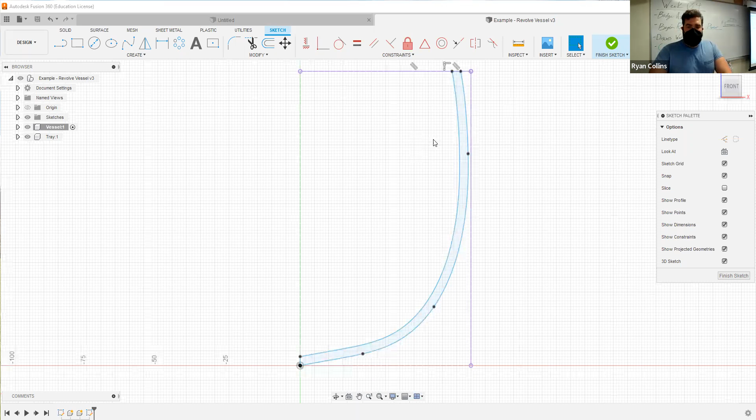So I left off finishing up this profile. Instead of using a fillet to round over this top, I wanted to use a circle, so I'll go to create circle—not just a circle, a 2-point circle. This lets me select these two endpoints and create a circle based off that, which is a convenient way of making a rounded top. I can trim this out to make things easier, so I'll go ahead and do that.

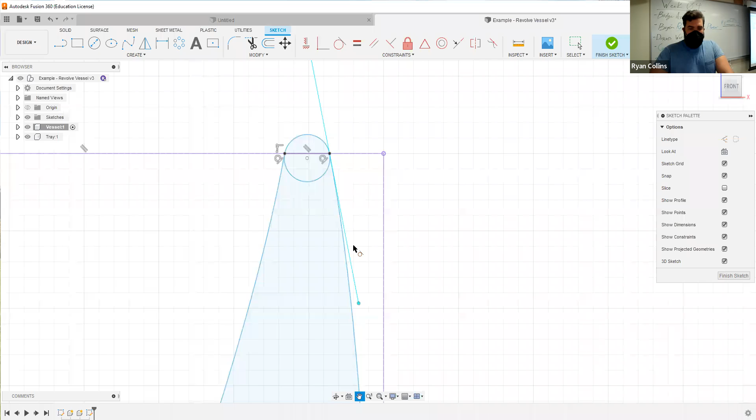This is also something to watch for: as I created that circle, it's not a perfect tangent, which is a downside of using this method. To fix that, let me escape and use the tangent constraint. I'll select this line, then select the circle, and it snaps the circle into place. I'll do the same with this line and circle, but now it's going to do some weird stuff—yeah, that's what I was afraid of. It's technically a tangent now, so I can't use that one.

That's okay, since I just wanted to create a rounded top. Instead I'll trim some stuff out. Using trim, I want to trim out this internal piece, but here I can either trim the excess or the internal. I'll trim the excess and hit escape.

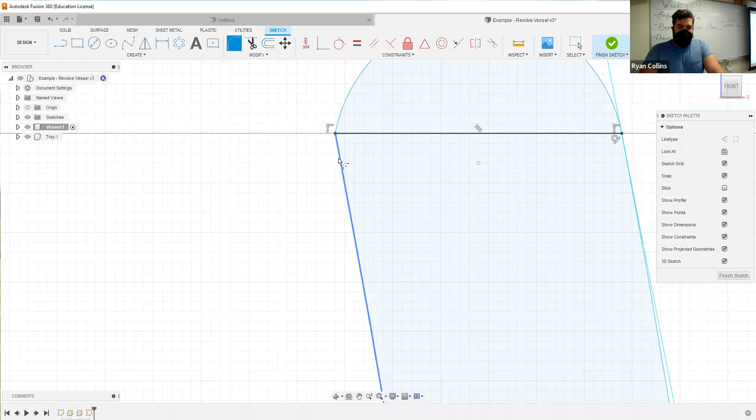What I'm trying to do now is use a fillet to smooth these two over. Let's try that, fillet there to there, and now I can just adjust the radius of this fillet. It's getting some weird results too, because this was all created using an offset. A little curvature isn't the worst thing in the world, so we'll live with that for now.

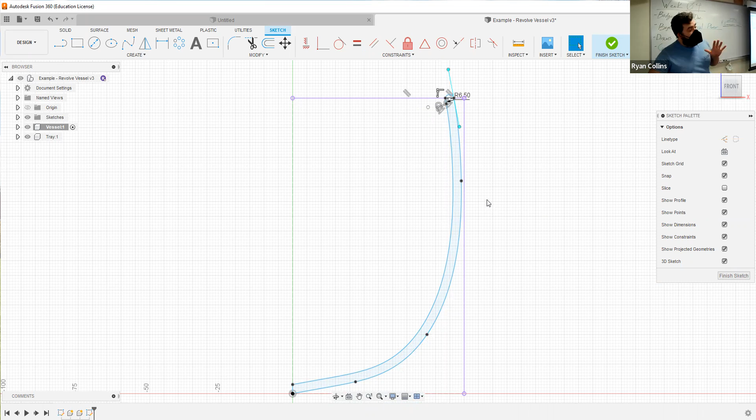Let's zoom back out, or just hit F6 to zoom back out to the whole project. This is the basic element of what I need. Is it complete? No—if this is a circular thing, it's going to tip over, but we'll get to the weeble wobble thing in a minute. So let's save.

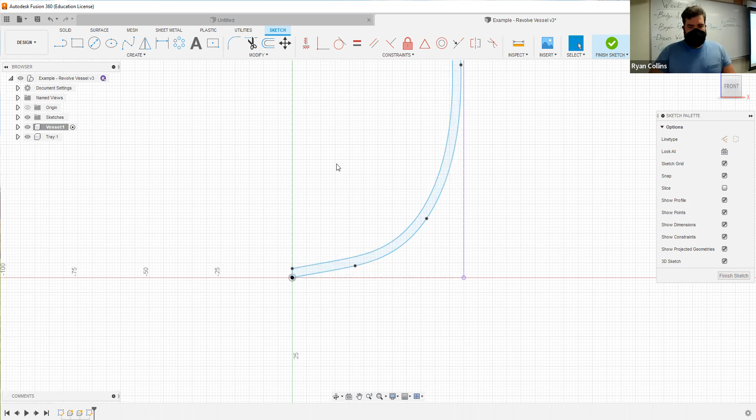Base profile. Or profile. Oh, file—there you go, speak and spell.

All right, hit finish sketch. Now remember, I'm still working on—I didn't reactivate just the base sketch. That's okay, or the vessel. I want to make sure I'm working on the vessel here, because if I left the whole project open, my next step would end up putting the revolve into the whole project rather than within this component, and it gets confusing fast. So make sure your vessel component is selected, or the appropriate component.

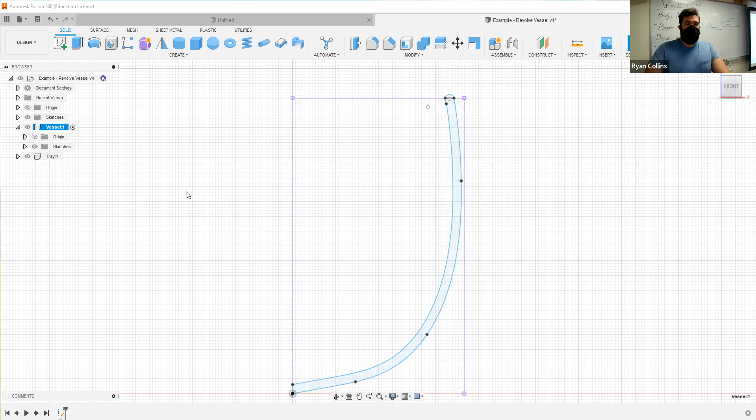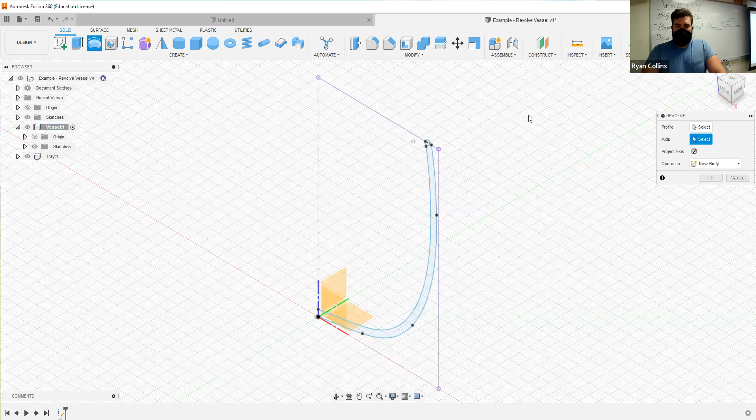Instead of extrude, we're going to use the Revolve tool up here at the top. As you mouse over it, it gives a clearer idea—it takes a profile and rotates it around a center axis or center point. So select there, and I'll go up to my view cube and hit the home button for an instantly clearer view. Select profile—that's the profile I just made. For axis, I'm going to select the Z axis.

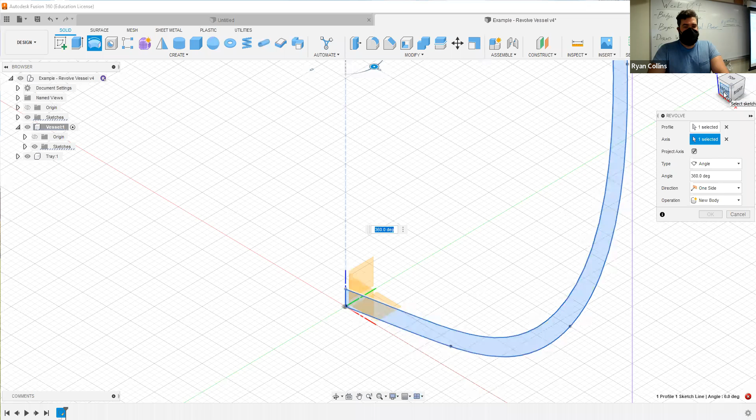What's going on? All right, it says 'profile crosses the revolve axis.' That's the error I just got—it means the profile goes over the axis I selected. Let me go back to front view and look. It's very slim, but what happened is that offset took it just a tiny bit over. All right, we'll cancel out of that.

Let's go back to the project and edit the sketch. What I need to do is just edit this out. Now, it shouldn't be an issue, but apparently it is. Not sure where that ended up—this is one of those things where it's so tiny, I can see it now once I keep zooming in. This is the problem: see how this line goes just a tiny bit past that center dotted line? That's the problem. So if you run into errors, sometimes it's something screwy happening, and sometimes it's a teeny tiny thing that shouldn't be a problem, but it is.

So let's trim—oops, what just happened? I don't want section analysis. Whoa, all kinds of stuff just happened. What happened? I pressed the wrong buttons here. All right.

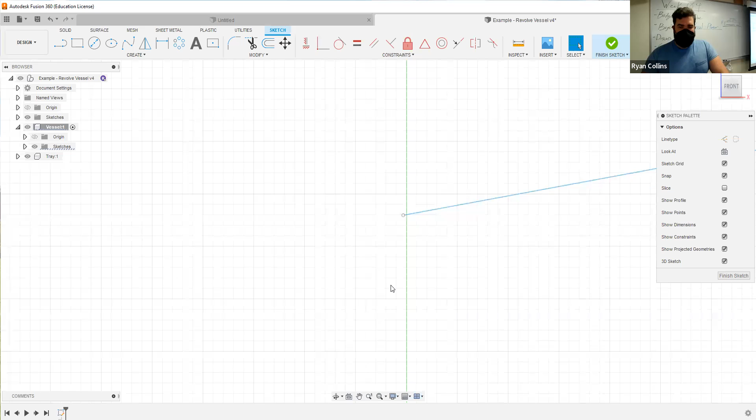So let's trim this, that line. And now what I'm going to have to do is zoom way the heck in. I don't even know if it'll let me. There we go. As I get really, really close, now you can see that tiny bit is just past there. All right. Fine.

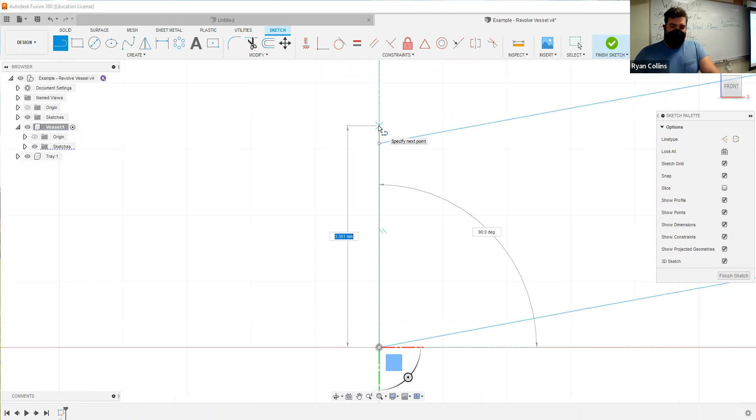So let's ensure that this fix is a fix. So I'm going to create a line starting at the center point. And when I go up, I'm going to go past that point. That's fine. Or if I want to really make sure that that line is straight up and down, hit tab and go over to where you can select by degree. Leave it at 90 degrees. Hit OK. Again, that line is black because it is locked in place.

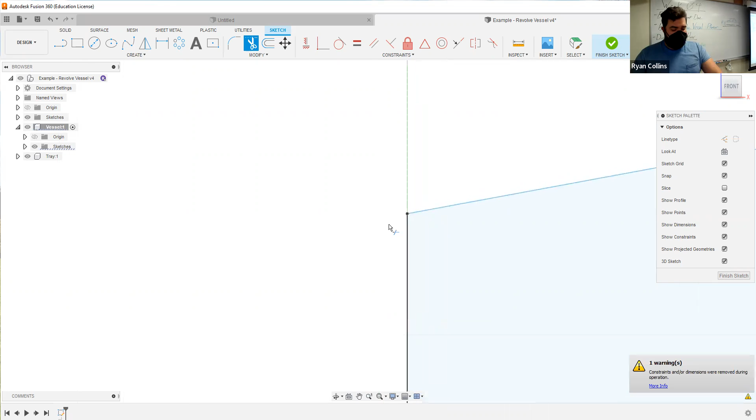All right, now I can hit trim. Let's trim that excess. But I also want to zoom way in and trim off that teeny little nub. All right. Constraint warning because I just changed some stuff. Let's zoom back out. F6, finish sketch. Often enough, something tiny like that. Try it again. Go to Revolve. Select my profile, that axis, Z-axis.

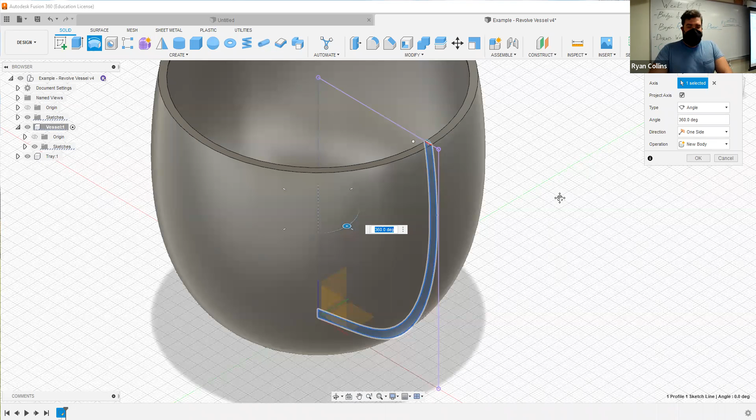Instant object. So what this is doing, and I can select by also this cursor over here. I can drag that, and I don't have to make this an entire round. In this project you do, but this shows you what's happening. Create a cross section by selecting 180 degrees, and all I'm doing is creating a single profile that gets rotated around. It's a really cool tool for creating any round object of whatever random profile you want.

This doesn't have to be smooth. This doesn't have to be a functional thing. This can be a wobbly Pee-wee's Playhouse, jagged, all kinds of crazy stuff.

Let's keep with the obviously current references with Pee-wee's Playhouse. Thanks, brain. Yeah, why not?

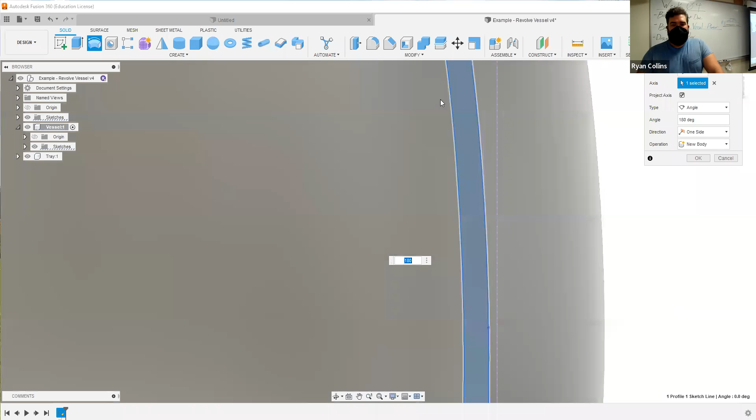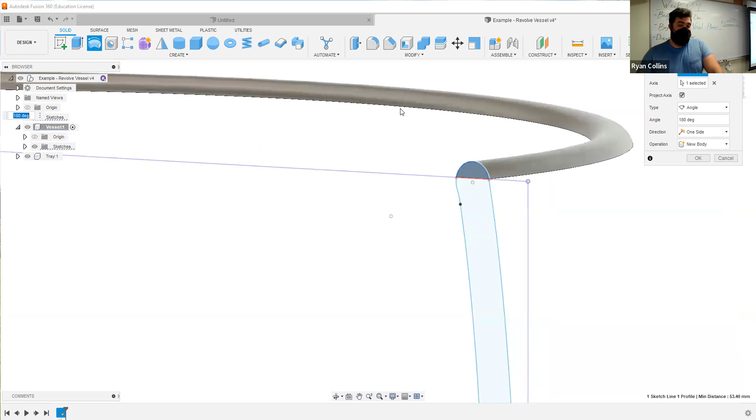All right, one quick thing though. If I zoom in, it's a flat top because I didn't select that upper profile because there was another line crossing my profile. So go back up to profile, select. I don't know why it won't let me just select one. So you got to X out of that, select both of those, or just the top, and now I just have a half ring. Oh, come on.

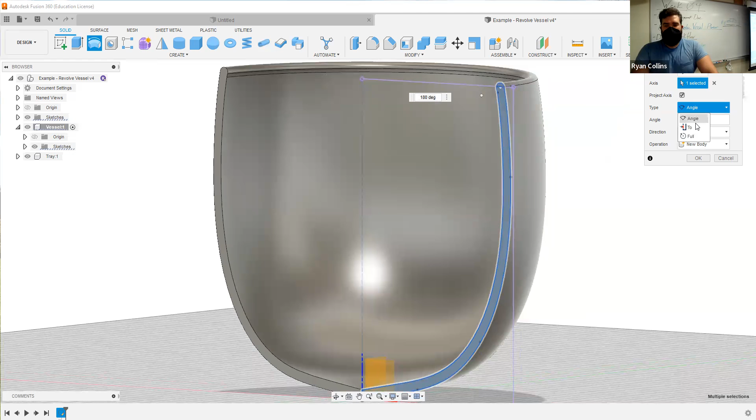I hate when it does that. Sometimes it won't let you select two things after you've already selected the second piece. Go back, select there. There we go. And I still had it set at 180 degrees. You have your types here too, by angle, to an object, or just full. So we're going to leave it at full or 360 degrees. So good, we got it. Now this needs a foot, stuff like that. Select OK though. There we are.

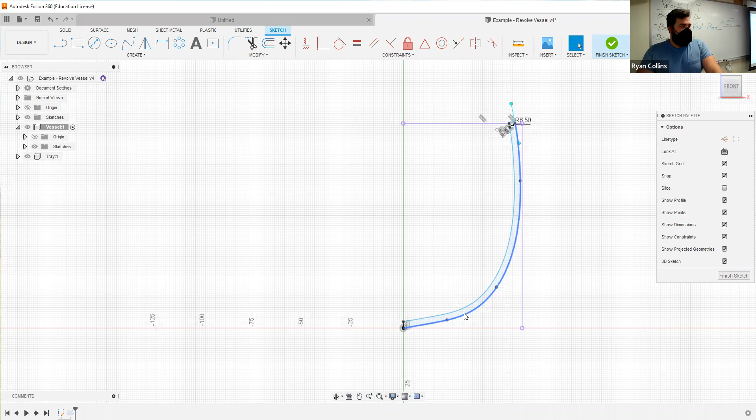So second part of this is, this needs a bottom, so we can adjust that profile. Let's do that real quick. Let me go back to edit sketch, that first one. Now this is a part where you can either just add a foot, a flat section, whatever. But ideally, if you were to actually print this, it doesn't have to be technically functional, but I want these projects to be printable. So let's add a foot to it.

What does that mean? Well, I can either add just a straight line. Let's just start at that point. Doesn't really matter. I'm going to add a little fancy foot, draw it outward. Where's my cursor? What's going on here? I've had that happen a couple times tonight where my cursor just completely disappears. So I can add a feature here, which is just going straight up.

An easy thing to work is if I want this to be a tangent, I can add my point snapped somewhere along this profile, select there, hit OK. But if I want this to be a tangent, select the constraint, select that line. I guess it only works with a circle. That's unfortunate. I thought it would have snapped over. It usually does. Well, I can drag this point up and down if I want to make this a little bit fancier. There we are.

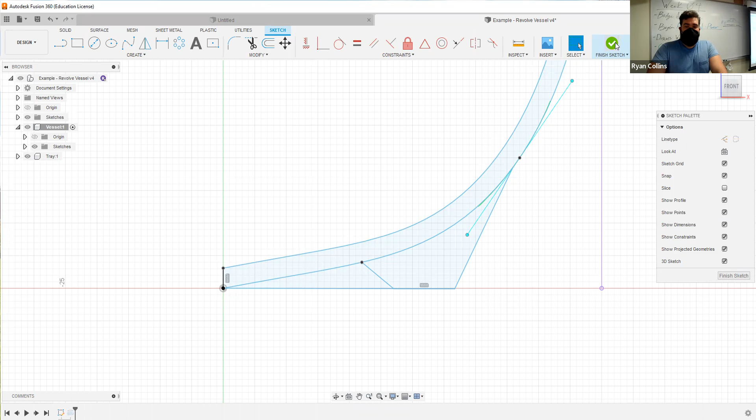Or you can use the offset tool, do the same kind of thing. If you want this completely flat, you can also just draw a straight line out to there. And now I have these crossed off sections. You can cut sections apart if you're not really sure what you want to do yet. No saying you have to have it locked in place. You can always go back and fix stuff later. Finish sketch. Now, I do need to have my sketches visible again to finish this out.

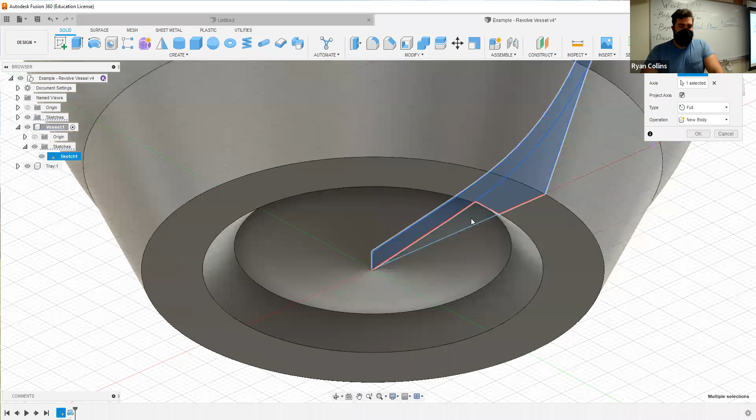So expand the sketches section, make sure sketches are visible again, go back to my Revolve, edit feature, profile. Yeah, let's add a profile there. Now it's got a hollow bottom. You could also select that additional feature if you want to have it a solid bottom. I'm going to leave it as a hollow.

Okay, it's joined. It's all one piece. Great. Now I can print this and it'll actually be flat and sit there. You can also trim up that sketch, make it flat underneath. I'm going to leave that where it is for right now just to move on. All right, so let's save there. Vessel made.

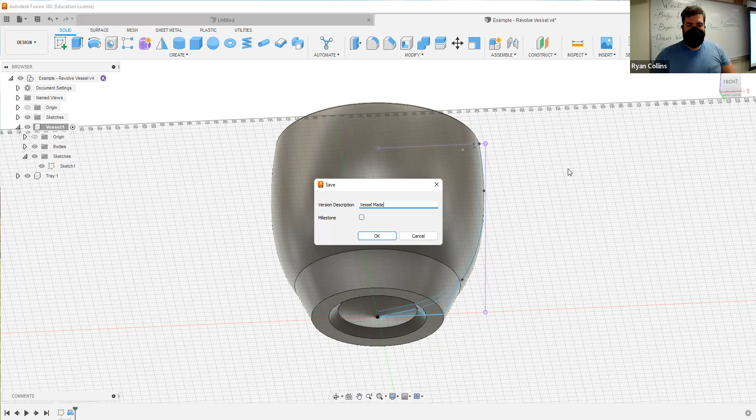Now let's do the same for the bottom. I want to create a tray. So now I'm going to collapse all of these just to get it out of the way. I'm going to change activation to the tray component. Now you see when I selected that, my vessel is still visible, but it's ghosted out. That's just so you can still reference it, but it's not going to obscure your view.

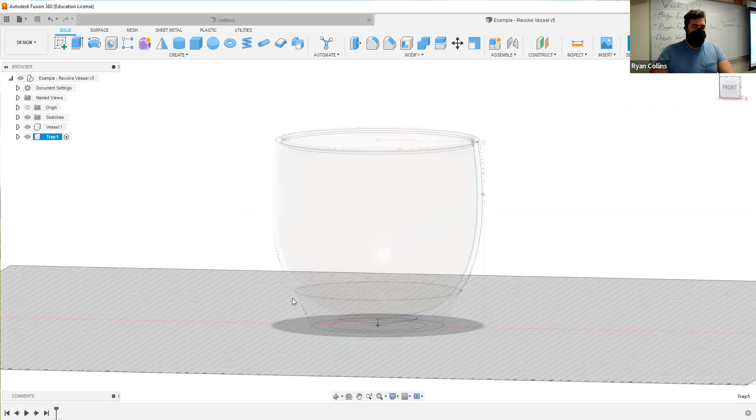Problem is you can still select stuff, and that sometimes gets awkward. If you're trying to work and your original object keeps getting in the way, you can just hide it entirely, and now it's gone. I'm going to leave it there for now, though. Let's go to front. I'm going to do the same thing to make the tray. Create sketch, XZ plane.

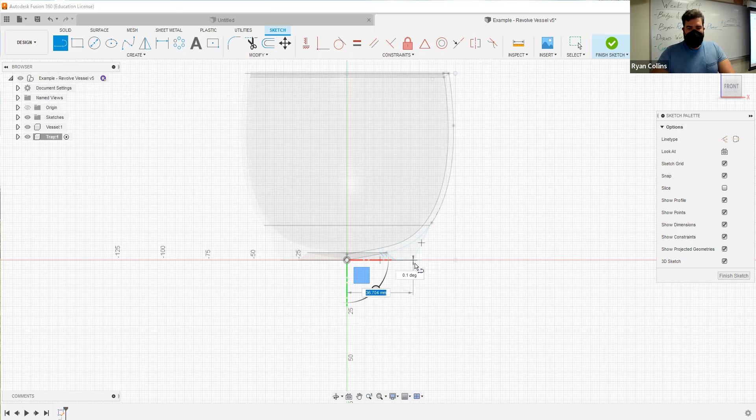And let's see here. Let's start with something more like a tray, flat on the bottom, go straight out. Why is it stopping? What's going on here? That's very strange. It keeps stopping. There we go. I don't know. Let's make that 45 millimeters out.

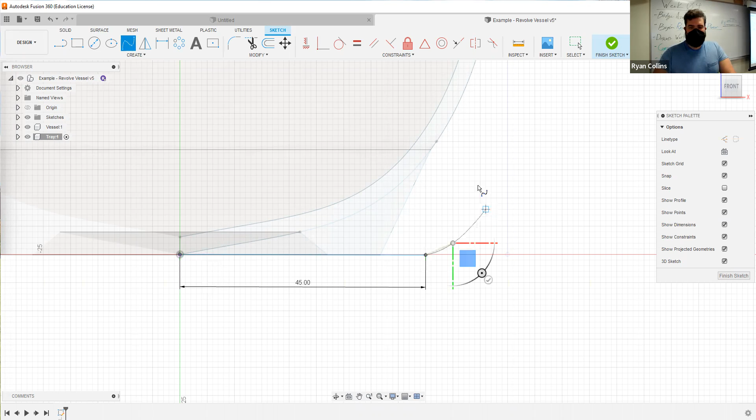Now I can switch over to a fit point spline. And let's just curve upwards. We'll make this a fancy little tray. Go to there. Sure. Let me adjust this a little bit so I have a better transition. All right. That'll work. Hit enter. Do the same. Use an offset feature. Now I want to go to the negative, so it goes downward. So we'll say -3. That works.

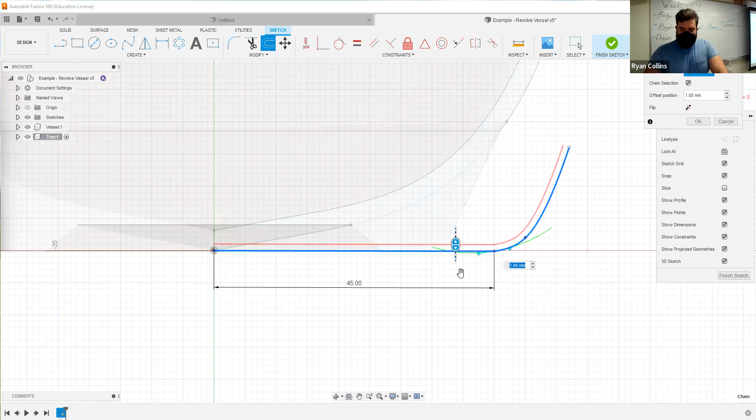Cool. If this is not a flat bottom for you, you could do the same thing, create a foot, or you could even add a foot anyway. Let's do a similar feature. Start somewhere here-ish, work downward, flat again, somewhere up there-ish. Works for me. Don't forget to close this profile. So start at the bottom, go straight up.

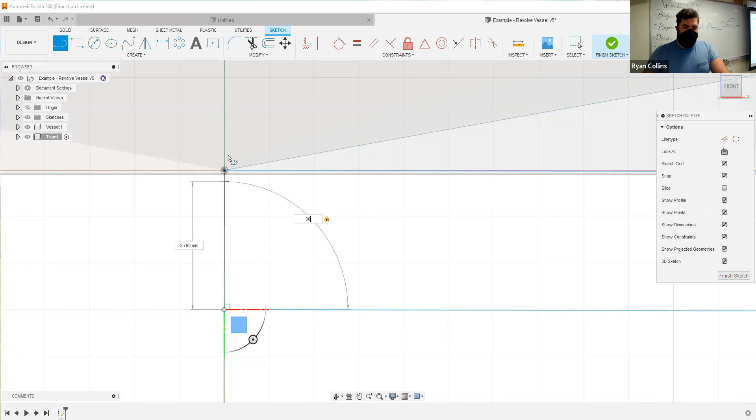Now note, this is a problem here. Something happened here, I think I'm going to have the same issue again. It's snapping to not perfectly 90 degrees. So let's tab over, hit 90 and go straight up. I don't know what's happening there. What might be the case is this point started somewhere else. So let's just move upward and see if it creates a problem later. All right.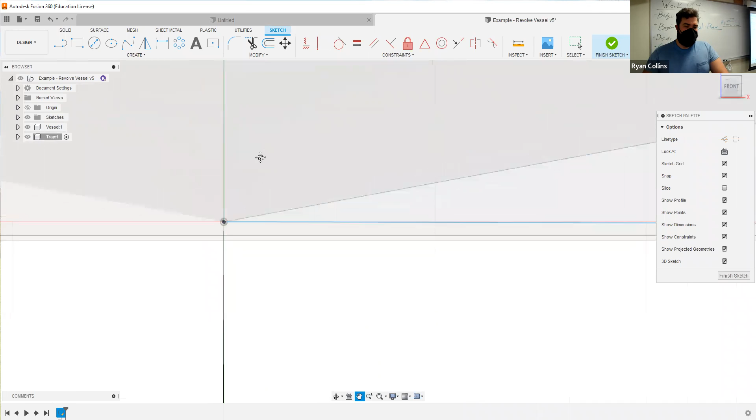Yeah, look where it's snapped to, not in the center. That's very strange. So you know what? I'm going to catch that now. Let's delete the original line, and instead of going from the bottom up, let's go from the top down. Create a line right in the center. Tab over, make sure that's 90 degrees. And I'll just go past my line. There you go. That should work, but let's close up the other end of the profile to make sure.

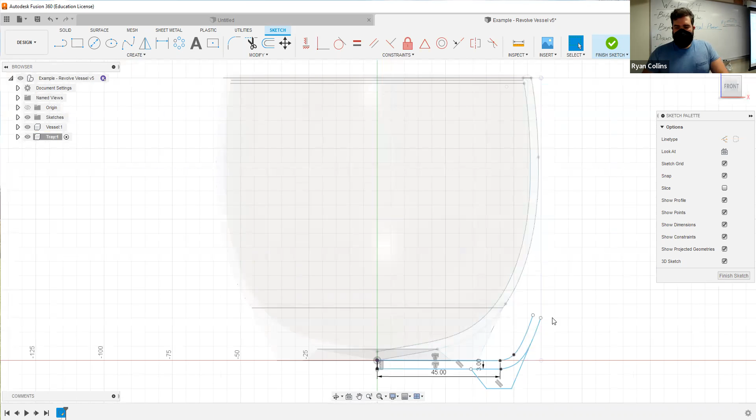I'm going to do the same again with a 2-point circle. So go to create, circle, 2-point. Drag the 2 points to between that circle. There we go. All right. Trim out half of that. Yes. All right. Well, it is a closed feature, so we're good there.

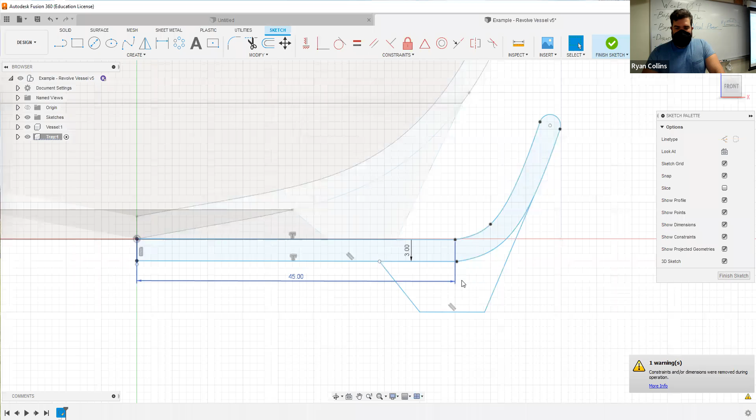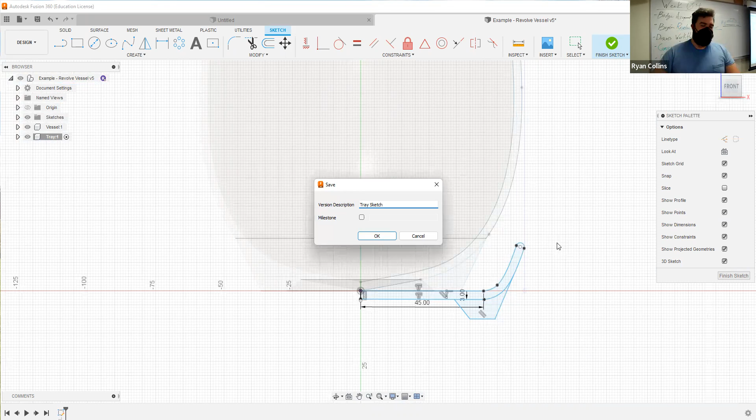Problem is, that is not. I don't know why. For whatever reason, it snapped below. Okay. Go to modify, extend, select that line, it snaps the rest of the way. Okay. Went light blue. Now I know it's a closed feature. Great. Let's save. Create sketch. And I'm also just saving these as points for you to reference back to later. Finish sketch. Same thing. I want to use the Revolve tool. Select these two profiles.

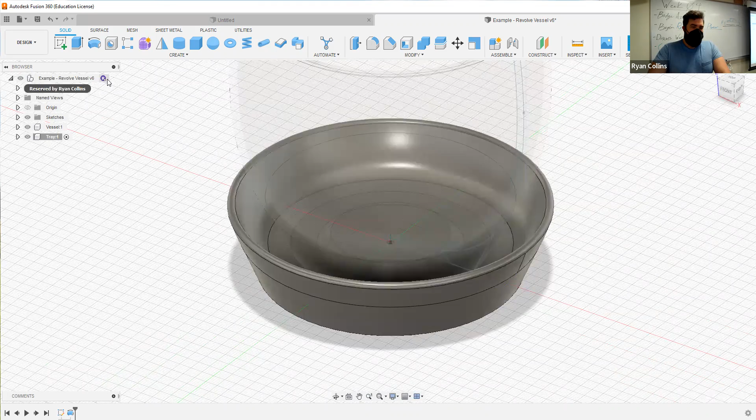Axis, again, Z axis. I've made a tray. Hooray. All right. Now, to activate both or the whole project, go all the way up the hierarchy tree. Select there. Now both of them come up.

All right. So last thing for tonight, we'll go over the cutting holes and such in the bottom and fine tuning next class. But for now, I want to show you the appearance tool. Now, two options here. Right now, this is currently in appearance mode. You can toggle this to automatically assign colors if you have more than one component. You can toggle by pressing Shift N.

Now, these colors do not reference anything that is actually subject to your project. This is merely automatically assigned colors to help you differentiate different components. So as we make more complex projects this semester, using the automatic color mode will allow you to just see your projects more clearly. However, this is not the appearance I'm talking about. I'm talking about the default appearances to actually apply material appearances.

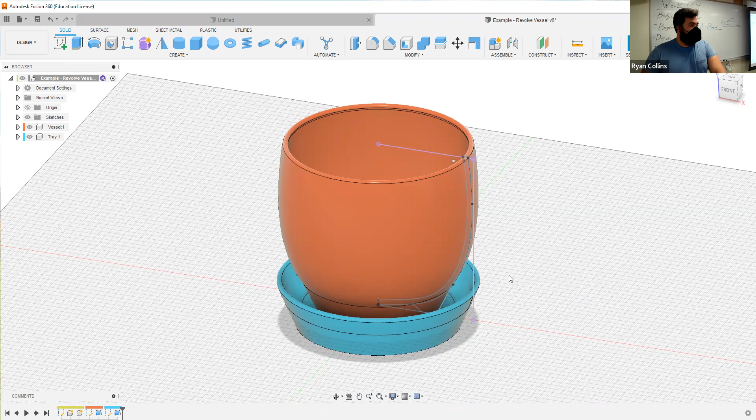So I'm going to go back over, Shift N again, toggle over, and I'm going to just press the A button, Apple. Or Alpha. There you go. All right, so new toolbox appears, and the default one is this steel satin. Now scroll down, you will have a whole bunch of materials and appearances you can put on here. You can make this liquid, leather, wood, stone, whatever you please.

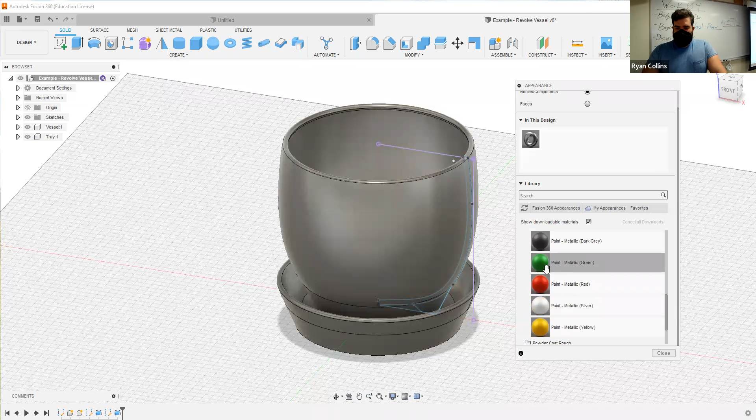This part is not a requirement, but if you want to play around with this, it's fun. So for this, we'll go with paint. Let's say, metallic, because why not? We'll go with something sweet like green. Drag and drop that over to the object, to the body.

Now this paint swatch appears in your project, and this little reflective looking thing that kind of looks like a smile, that is merely an implied reflection of the surrounding area where the material photos were originally taken. So I guess it was originally taken in a hallway or something. That's all that means. Got a whole bunch of stuff you can play around with.

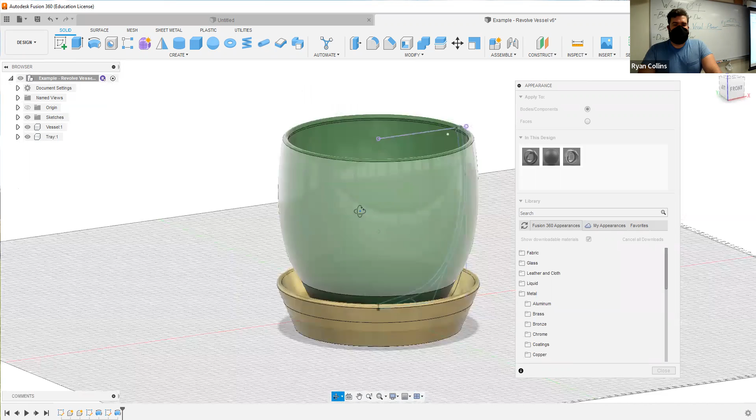Let's make the bottom one gold, because why not? Polished gold. Heck yeah. Sweet. So the tray is gold and the pot is metallic flake. Awesome. Close or press A again, and you'll get out of that. All right. So appearance tool added.

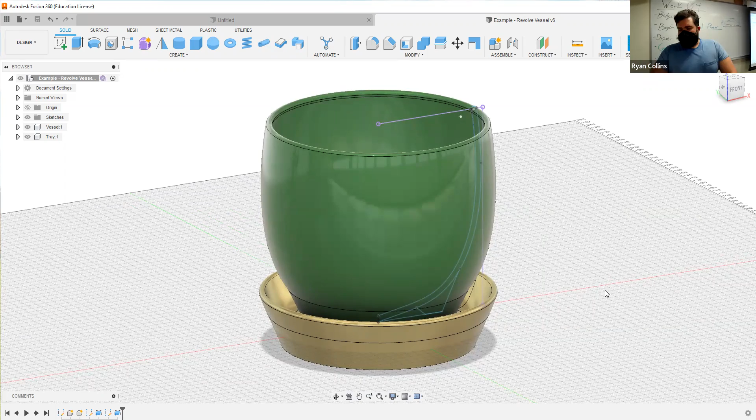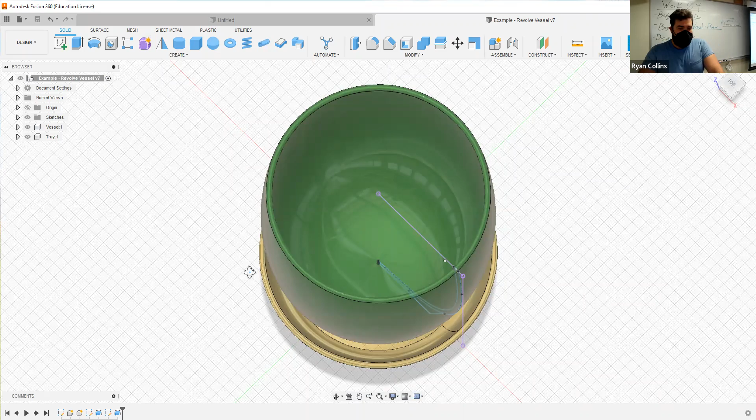Well, I guess there is a little bit more time. So let's go ahead and show you the other feature of this project. We're going to fine tune this plenty, specifically for printing availability. But since we have time, last thing is I want to cut drainage holes into this. Now I'm not going to need drainage holes in the tray because that kind of defeats the purpose of a catch tray. So for now, let's just hide the tray.

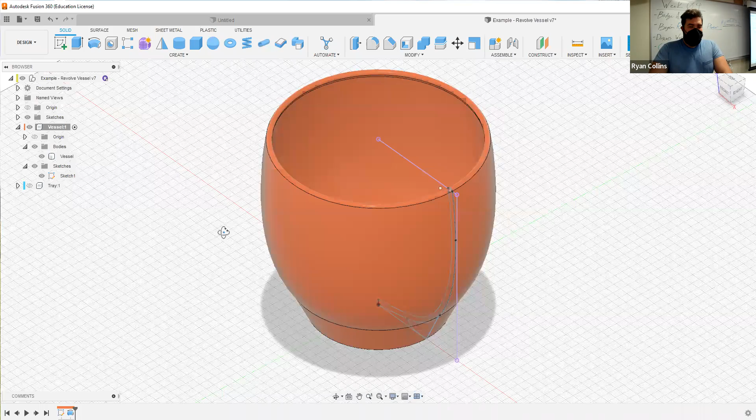I want to activate just the vessel because I'm going to be working on this vessel. If this appearance is getting bothersome to you, you can switch back over to auto assign color mode, Shift N, and there you go. I'm just going to expand the tree again to help me see what I'm doing. Don't really need bodies, but I'll also rename that one while we're here. So what I want to do is cut some holes in the bottom of this.

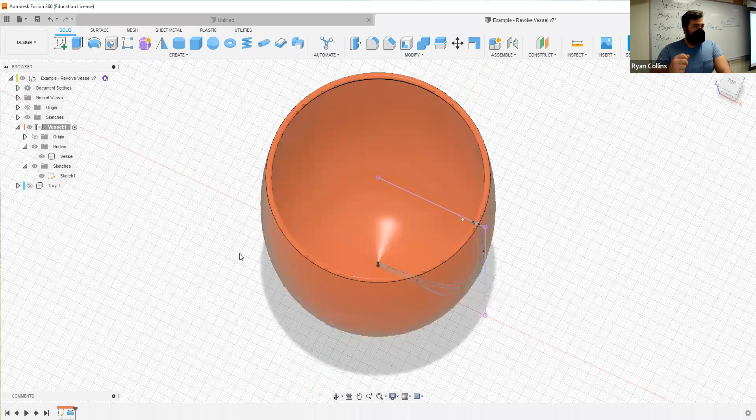So the easiest way to do that is I'm going to create a sketch. I'm going to extrude that sketch down, and I have a couple of options. I can either use the pattern tool to make multiple sketches and extrude all of those, or extrude one hole, and use the pattern tool to duplicate the already finished feature in that same pattern. Two different workflow options. Neither are necessarily correct. They are simply options.

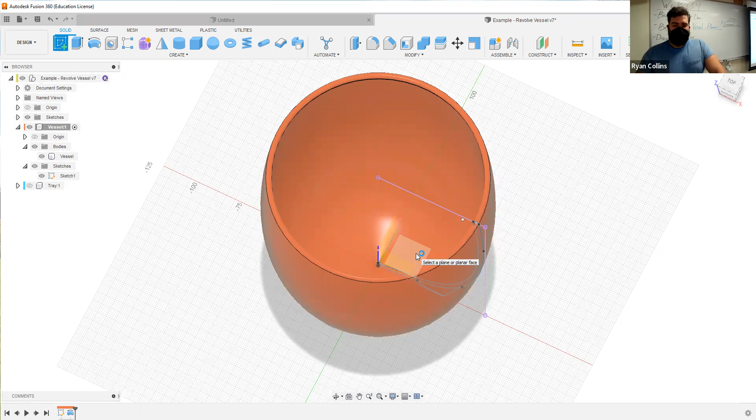So to do that, create a new sketch. In this case, I'm going to work on the XY plane, the plane we were using previously, your tabletop plane. Select there. And I'm just going to create a round hole, like it's drilled out. But I do want to make sure that it's going through the bottom here, and not through the foot or anything. I am currently working on that plane, so it shouldn't be an issue.

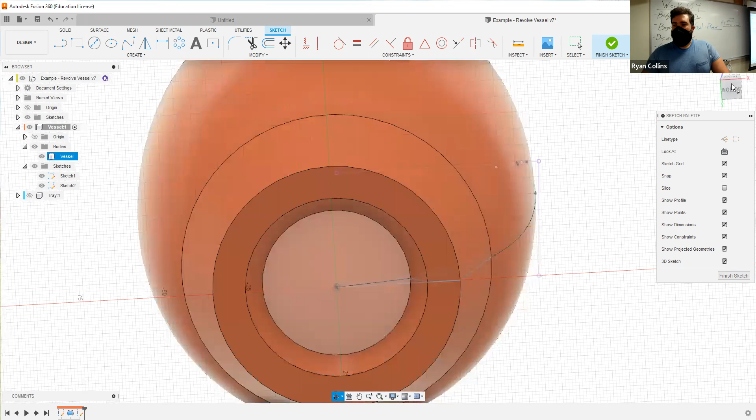Select bottom, circle, and I'm just going to go somewhere off of the X axis here, because it helps to work off of a direct axis. Works for me there. Select outward. 10 millimeters seems like a good size. Big enough for water to get through, but not so much that dirt falls through. Now, I can go to create, circular pattern, select that object, and my center point. Now it creates evenly spaced holes.

They don't have to be even, but in this case it is. You have your toolbox pop up, circular pattern. Distribution is full. You can go to the partial. The sliders allow you to add and subtract. The arrow slider allows you to still evenly space, but around a predetermined or numerically added amount of degrees. Or we'll just go with full for now.

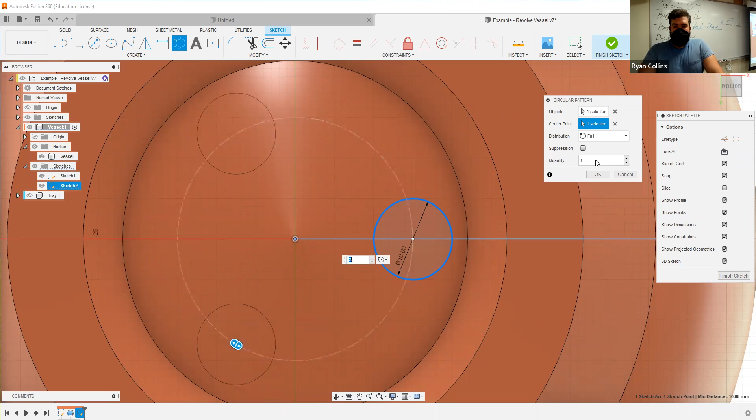That works. 3, no, but because reasons, I feel like keeping it odd numbers because it just feels right. There we go. 5 evenly spaced holes. Okay. Now I have those holes. Now, let's finish the sketch. Let's hide that first sketch because that's just getting in my way and a little confusing.

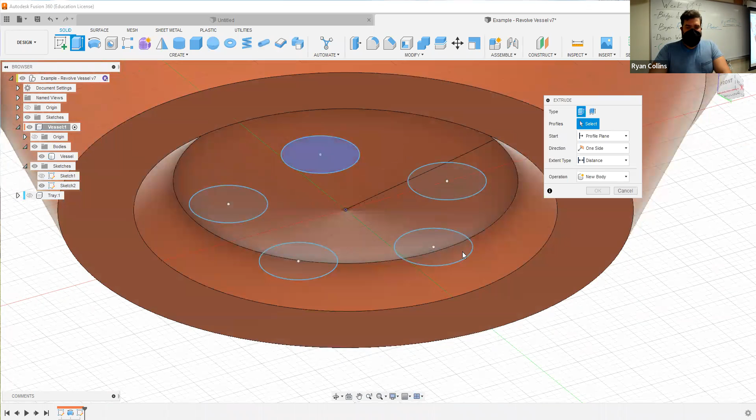Use extrude, and I can select all of these sketches. All right. Now I can use a slider and just go straight up. And as I move it upward, since it's passing this extrude through another body, it assumes and changes the operation to cut. That works fine. Now, I just did that with a slider, or you could do it by inputting numerically.

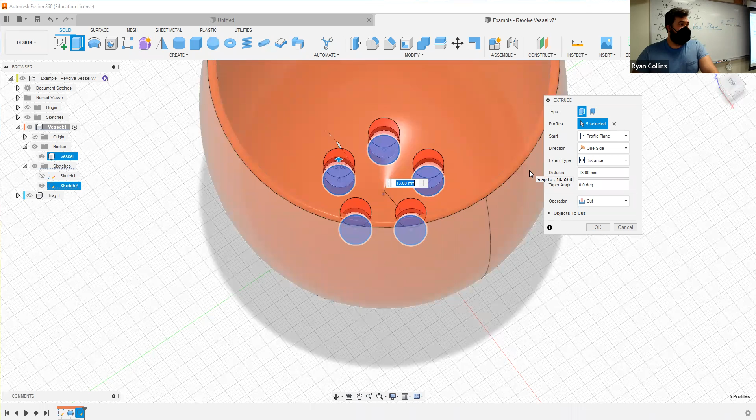However, what happens if I go back and change, maybe I make this pot a different shape, make it thicker, thinner, something like that. Thinner won't really be a problem. What if I make it thicker, completely different profile? Well, one of the things you can do is, instead of adding stuff in numerically, because what if something changes, you can use the automatic controls within Fusion that will allow it to change with the parameters you set. This is, again, called parametric modeling.

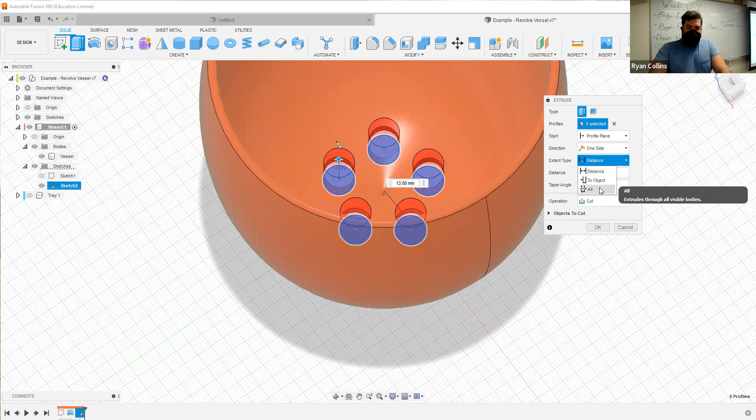So what that means in this case is, let's go down the list of my toolbox here. Start at the profile plane. Yep, that's fine. We don't need to change that right now. Direction, one-sided. Yep, that's fine. Distance. Right now, the extent type is to distance. Open the drop down, and you have options again. All means it's just going to go straight all the way through anything that it sees. Now, in this case, not a problem. However,

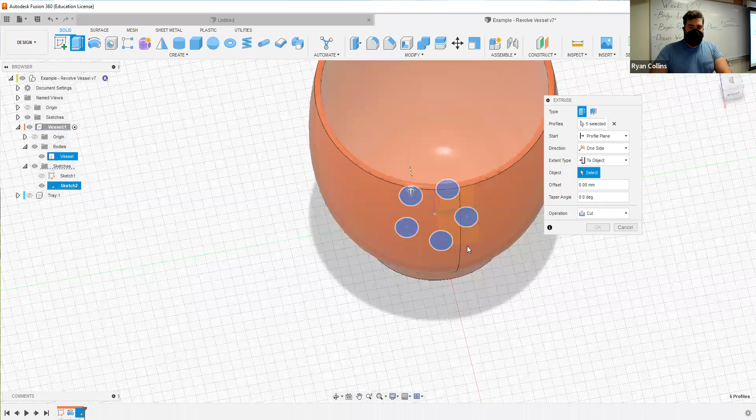to object is a really handy way of working. It will always extrude to that object. So in this case, I'm going to select just the inside face of that bowl. And now the extrusion happens just to that bowl. So if I were to thicken this, go back to my sketch and change the distance of that offset, it will always stop at that. That's handy if I were to add something else inside of here. It wouldn't continue up through that. Just a convenient way of working. So select there. All right, now I got drain holes.

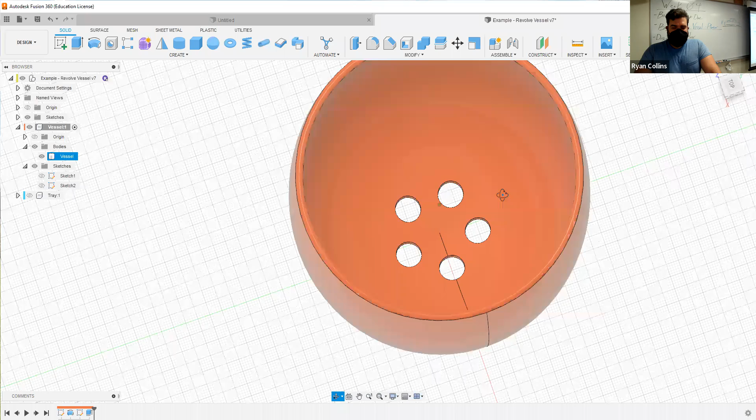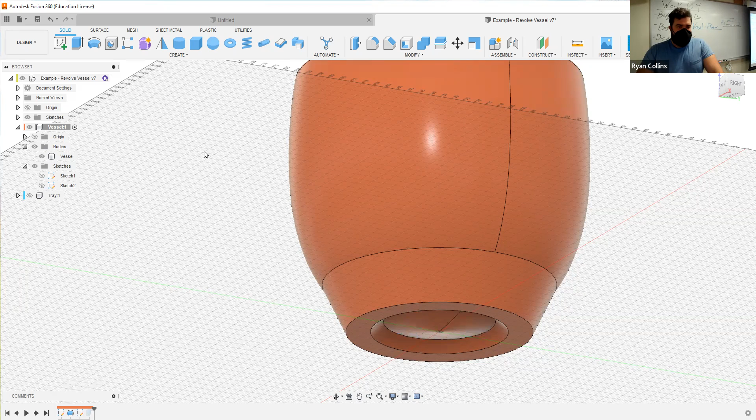Cool. Now, what I could have done alternatively, and let me move my toolbox out of the way here. Let's suppress this extrusion, just because I'm going to make some changes. So go back to that. Let's instead extrude, unhide that sketch, and instead select one of those, do the same, extent type, to object, select inside, just the one hole, cut, okay. Now the convenient thing about this is now I can make my alterations just to this and then duplicate this.

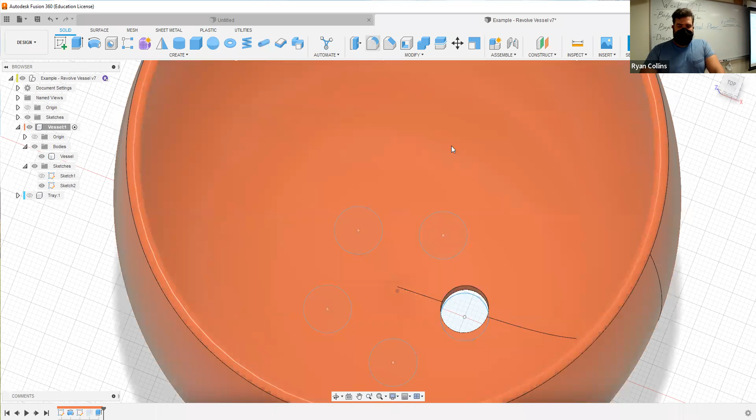So what I mean by alterations is, let's add some fillets. I'm going to zoom in, select the inside circle, and I don't know, let's say 1 millimeter. That might be huge. That's pretty good. Select OK, and just rounded it over.

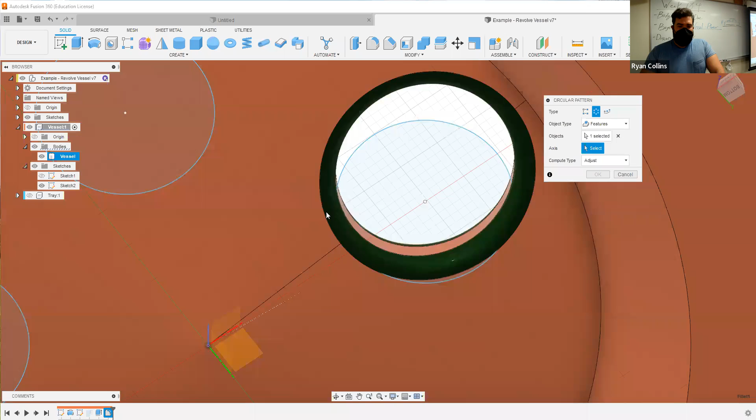Now I can go to do the same pattern, circular pattern, and instead of it being a sketch element, let's go to drop down, faces, features. Features means it's the whole of whatever you've done to something. So in this case, I'm going to select those features. So all of that, we're good. Axis, Z-axis. And let's just change it so you can see it more clearly for 3 of them, 3 holes. Select OK.

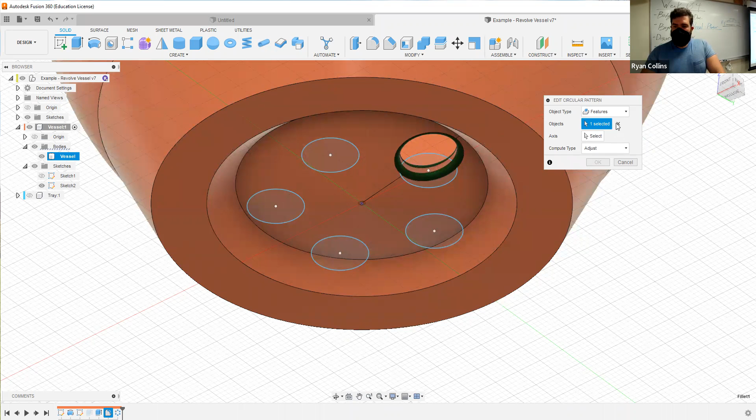What happened? It didn't compute. Might not have selected all the things. Come on. Great. Now it's going to make a chump out of me. Why is it not? I don't know why the appearance mode keeps trying to pop up. That's very strange.

All right. Fine. Let's go to faces then. No. Inside. There we go. I don't know what was going on with the features thing. Something was getting confused in here. Basically, the faces work the same. You just have to select the individual faces of a feature. Axis. My origin disappeared.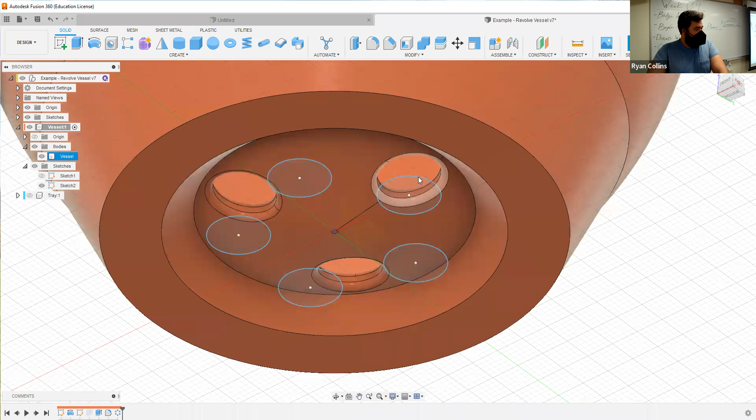Z-axis. There we are. So I'm going to leave it at 3 so it shows up more easily. Finish. Now it duplicated the entirety of what I've already done to one hole and multiplied that. So that's the difference. Are either of them wrong? No, both are an option. It just depends on the amount of work you're doing, and if you just want to work a little more smoothly.

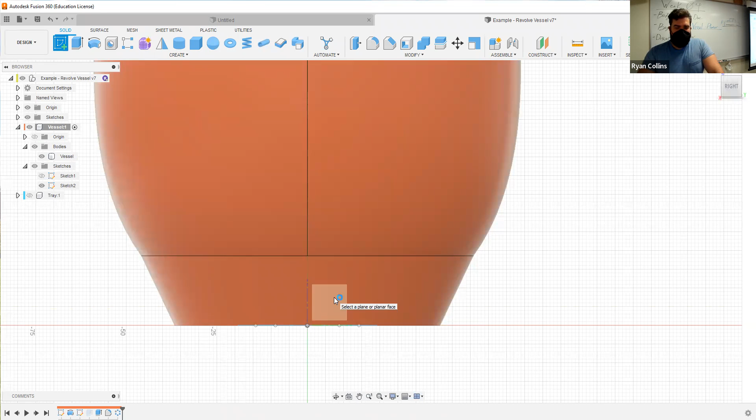I didn't add the fillets to the other one yet. That's all. I didn't really make any changes otherwise. All right. So there we go. One last thing I do want to add in here is, well, if water comes in here, it kind of gets trapped in here. I'm going to make another feature here. So I'm going to create another sketch on the YZ plane, and I'm going to create a center circle right there in the middle. Let's make that, I don't know, 10 millimeters. Finish sketch. Now, in this case, again, I have 2 different options.

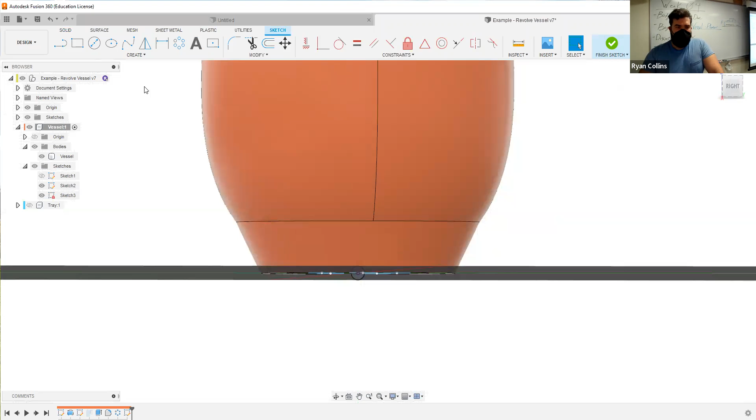All right, 10 millimeters might be way too big. Let's go back and make that a little bit smaller. Sketch, double click on that. Let's say 5, make it smaller. There we go. And extrude, sketch, distance to object, outside. It chops through. Cannot complete extrusion. Why? Maybe it's because of the distance thing. So let's just try direct extrude, chops through. There you go.

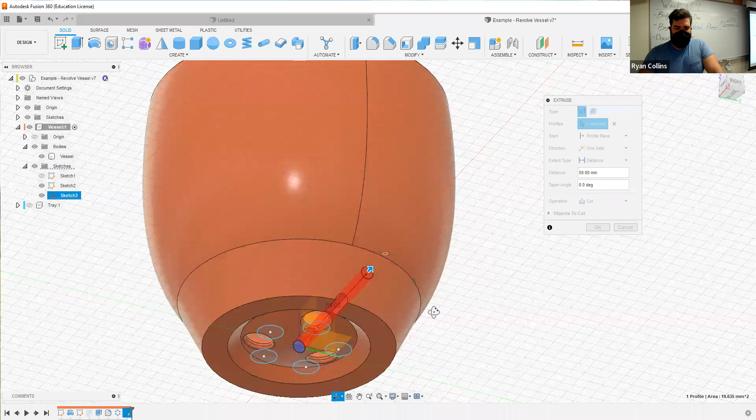Now, the only problem with doing this right here, I probably should have made the sketch a little bit lower because now it chopped into the bottom there. Now, if that's a problem, I can redo that. Or let me open that extrude back up, edit feature. Remember how we had some options for the start? Well, I can do the same. Offset here. Instead of starting at the original sketch point, I can do an offset. Let's move that over 10 millimeters.

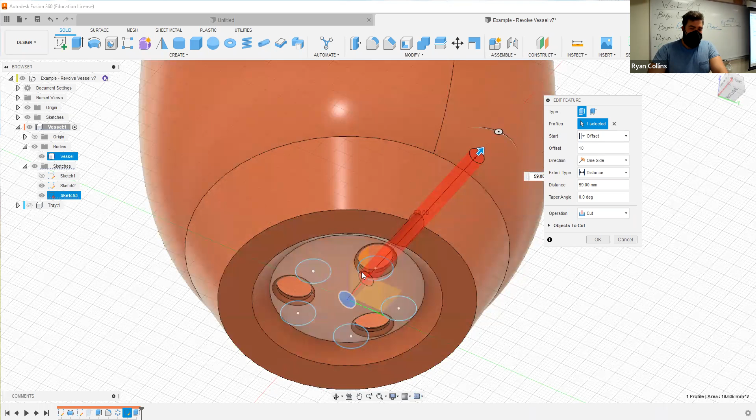What's that do? That starts the sketch 10 millimeters farther away from it. Let's make that a little bit further. So let's say 15. There you go. It kind of shows up right in the middle of that hole. Neat. Okay. From there, I can do the same. Create pattern, circular pattern, features. I don't know why it's doing that this time. Let's see if it works correctly this time. Features on that object, axis.

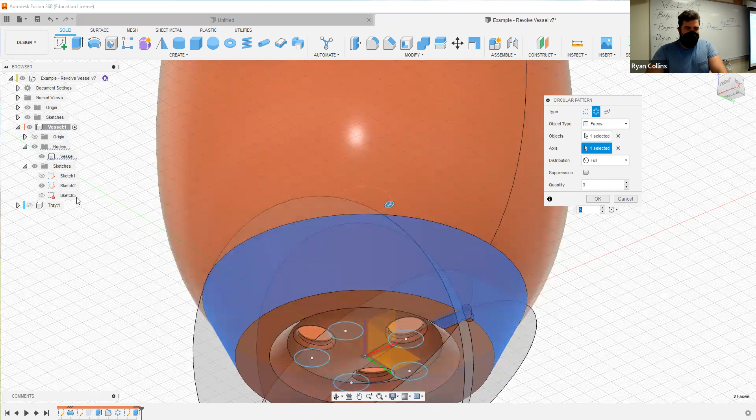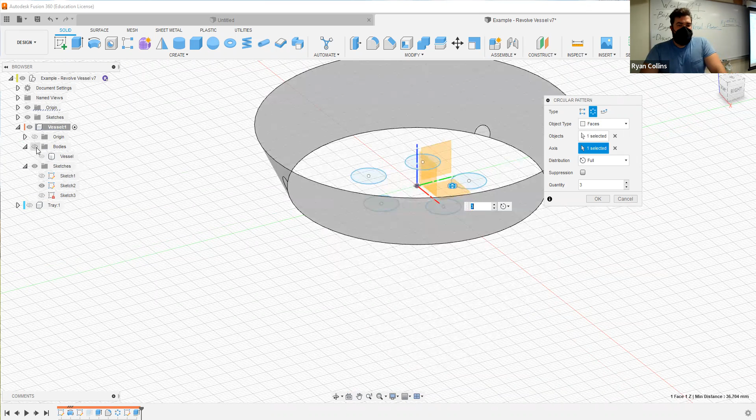Yeah, something's going on here. I wonder if the program got a little scrambly. So let's go to faces instead. Just there. Yeah, it's still on that object. That's weird. Come on, let me select the axis. If you can't quite get to something, what is that? Something's going real screwy here. There we go. Don't know what was happening there. Just hide and unhide the bodies. There we go. All right. What is going on with this thing? I think the power outage did some screwy stuff here.

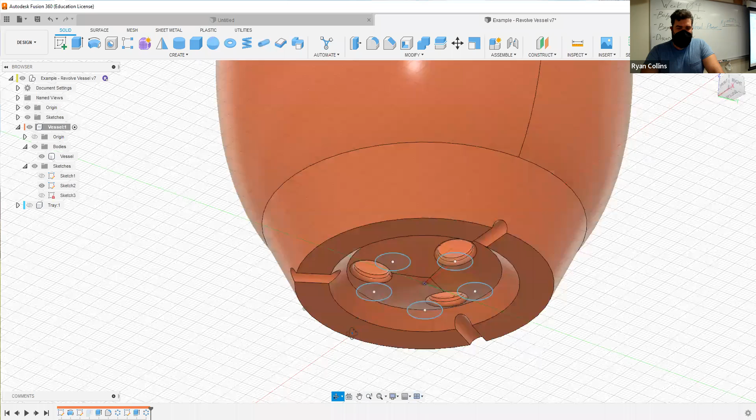There we go. So now it's made that same feature with faces 3 times around. Clicked OK. So now it has some little vent ports. So just a couple of different ways you can use the circle pattern tool to multiply the tools you've already done. If I wanted to round out the bottom here, easy thing, select fillet. Depending on what you select, it'll do it either just to the edge, so I could select the edge here, or instead, I could select all the bottom faces and put, let's say, 2 millimeters. Now it does the fillet to all adjoining edges of this entire face. Again, different selections will do different things.

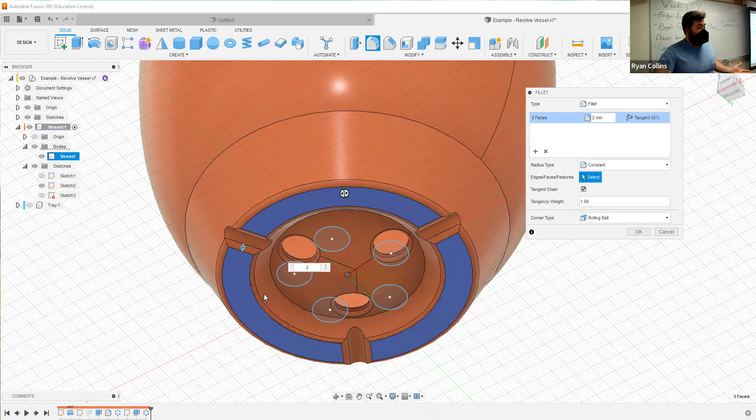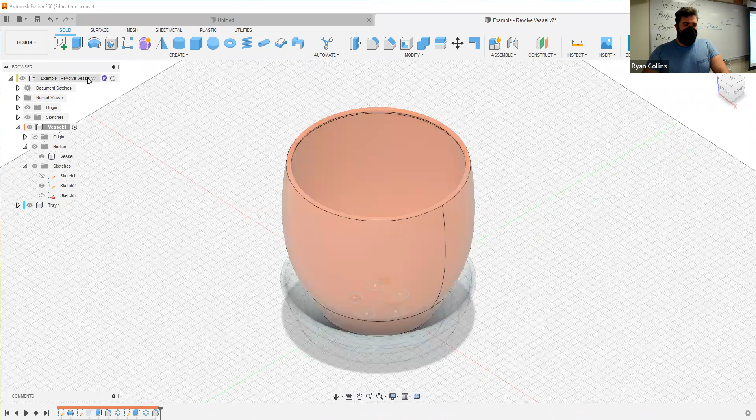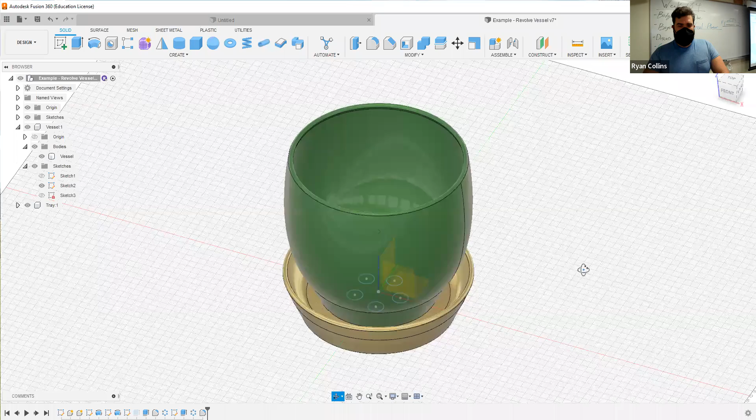All right. So that's pretty well good. It has holes in the bottom, a multitude of them; however many and of what shape, that's up to you. Unhide the tray. There's a tray to it. Let me reactivate the entire project. Go to the top of the hierarchy tree, select the selection box there. And there we are. So it's got a tray. Nothing to drip down through. If I press Shift N, it goes back to the appearances I've selected. Again, appearances are an option. You do not have to do that, but it's a neat option. Click save. Done.

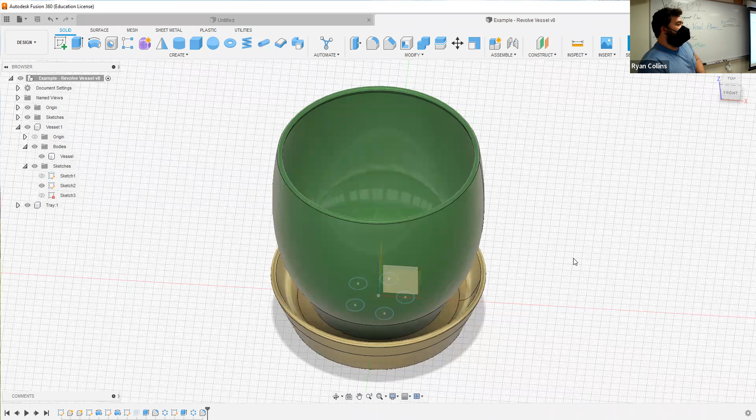I'm going to show you a few other options next week. But largely, we're going to discuss printability for these sort of objects, because the first project is largely just a flat thing that can print flat on a bed. This has recesses, curves, three-dimensional potential hurdles to address. Granted, there's ways to just directly print it, and there's ways to adjust your project for better printing. But we'll address that next week.

That's pretty much the project. It's got some holes cut in it, and it's two separate components. That's one of the main issues with this. So that's what we're going for. So good luck with it. All right.